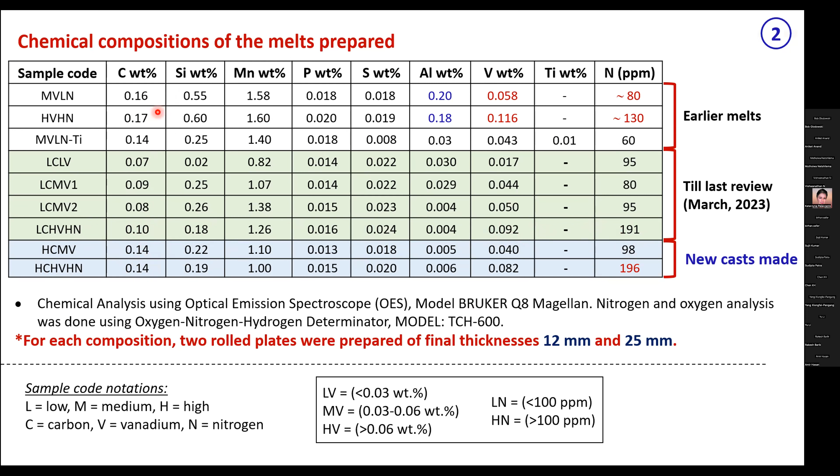If you have gone through the chemistry, in certain cases we got last time a little low carbon level, but high vanadium and nitrogen level, so this steel is interesting to look into. This time we have managed to increase the carbon level from 0.1 to 0.14, because structural steel generally has carbon around 0.15. So we were quite happy with this composition, but I am showing the further things.

So these are the Thermo-Calc predictions. Naturally, the steels where we have added more vanadium and nitrogen have a precipitation temperature that has gone up to about 1100 degrees. Going to the next slide, you can see the precipitate temperature and precipitate fraction we are showing, mostly vanadium carbonitride precipitates that we are expecting.

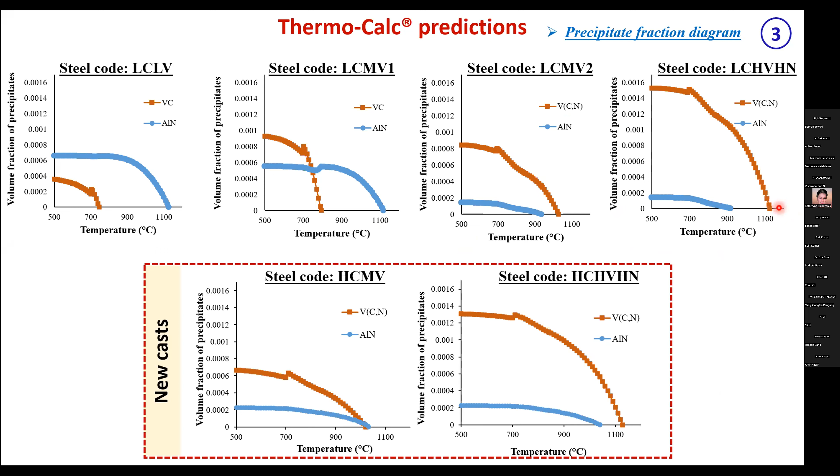These two I have marked in blue because in the presentation that I shared with Dr. Dev a few days back, these calculations were wrong, since we had dragged these temperatures a bit high, so zero values came up. So these are the actual precipitation start temperatures for this grade, 1020 and 1128. Still, 1128 may be considered a bit on the higher side for this high carbon, high vanadium, high nitrogen steel.

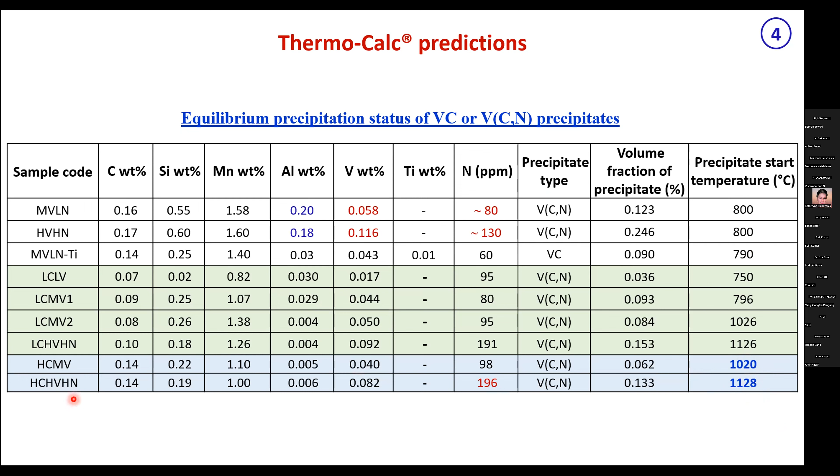These are the microstructures that I presented in the last meeting, which were rather good, quite fine microstructure with grain size in the range of 8 to 10, ferrite grain size in that range. The previous slide was for the 12 mm plate; this slide was for the 25 mm plate, where the grain size was a little higher, of course, because of the larger thickness and lesser rolling reduction.

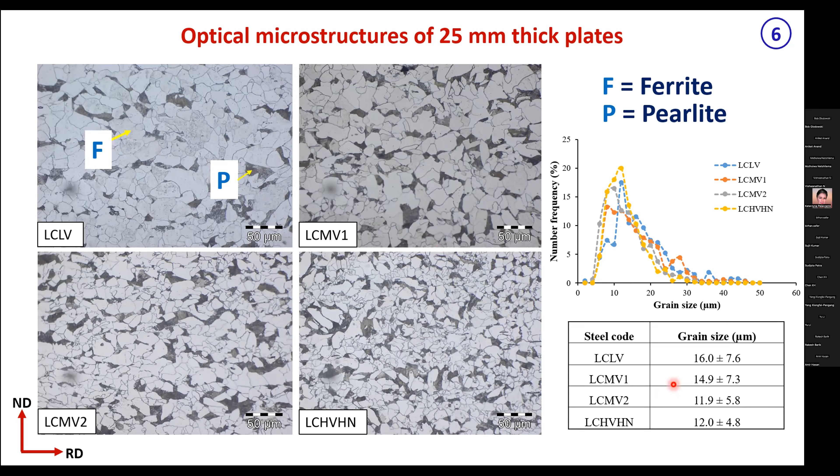This time, one issue happened with us: our grain size was relatively higher, you can see 13 and 18 in that range. We would have loved to have a smaller grain size possibly. As I talked to my collaborators, Dr. Kumar and Mr. Aniket at SAIL, they said the furnace temperature was a bit high and behaving a bit erratic because it was newly installed. So that, and the rolling schedule also, there may be some issues for which the grain size is a little higher.

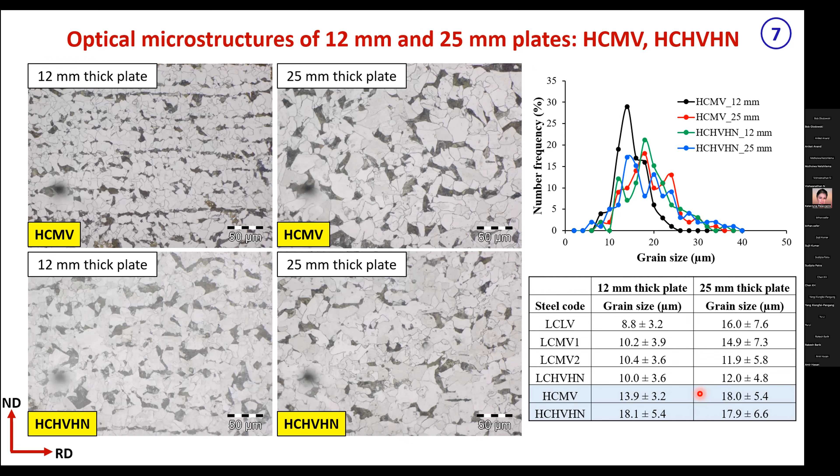So last time, these are the EBSD maps I presented, and this time, these are the EBSD maps. You can see the grains are slightly higher, but it's a nice ferrite-pearlite microstructure altogether.

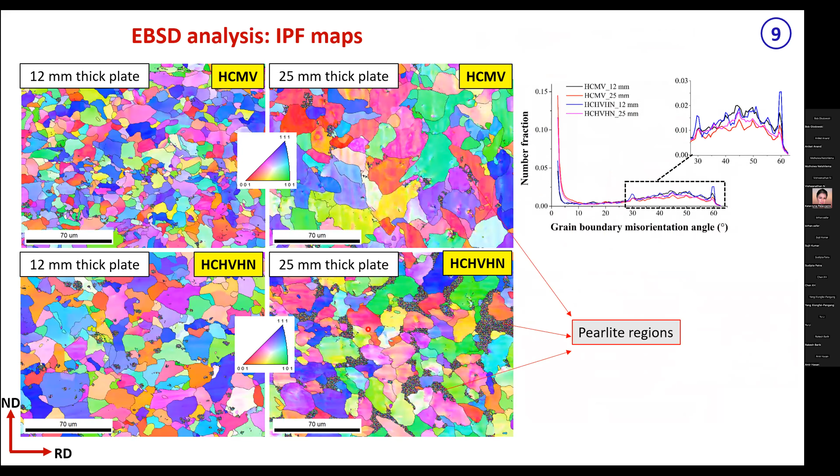Overall, these were the tensile properties. Last time, these were the properties that I presented here, for low carbon, high vanadium, high nitrogen steel, which showed quite high strength. You can see the yield strength level very conveniently more than 450 MPa and even crossing 500 MPa. This time we got good strength in our high carbon, high vanadium steel, but the strength was not that high, maximum around 460 MPa. And in this steel, high carbon, medium vanadium, the yield strength is around 400.

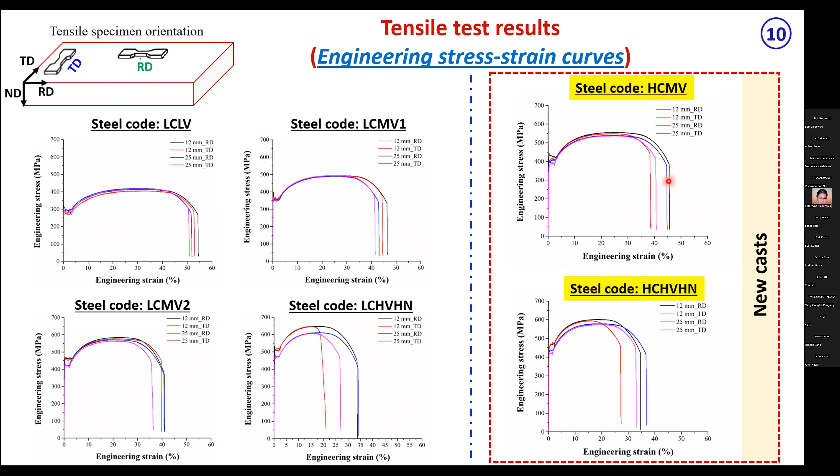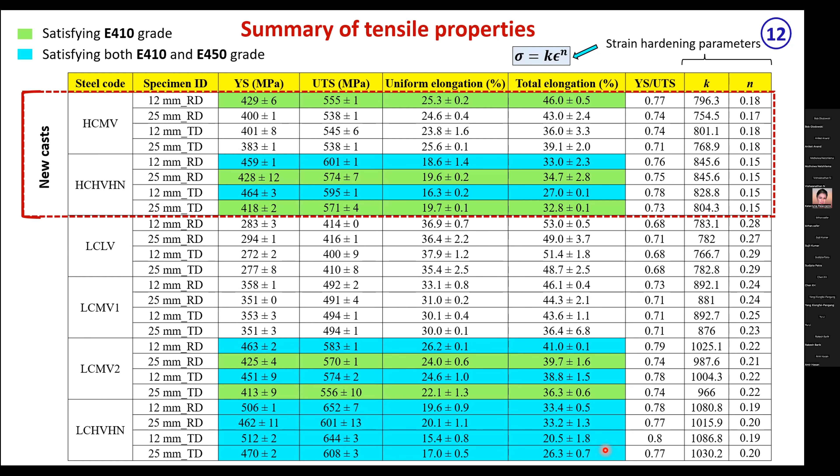And these are the properties I presented last time. In some of the cases, it was crossing even 500 MPa. So these were the properties. Overall, I would say that good variation happened in composition and processing, and we have seen our best case scenario as well as worst case scenario, and in all cases, what is the range in which we can get the properties.

Strength as expected increased with carbon, vanadium, and nitrogen. Nitrogen, of course, is very beneficial in vanadium containing steels. As we have seen, even at low carbon level, we have got very good properties. But this time carbon gone a little higher, but we are not getting that much benefit. In both steels, there was nitrogen about 190 ppm, more than 190 ppm.

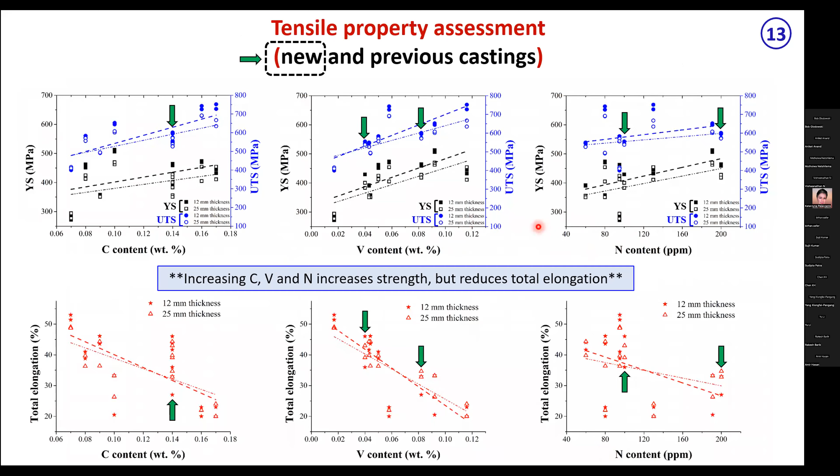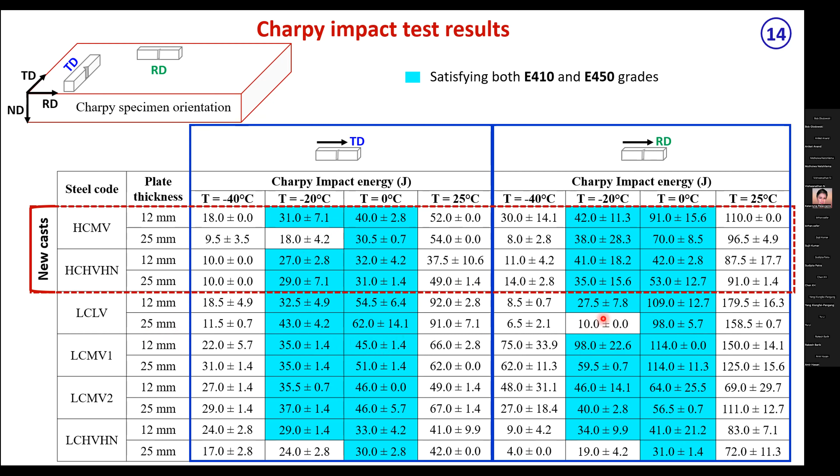Of course, a few exceptions are there where we have got a little less property in longitudinal direction, which we have to investigate. But otherwise, it's quite a decent result.

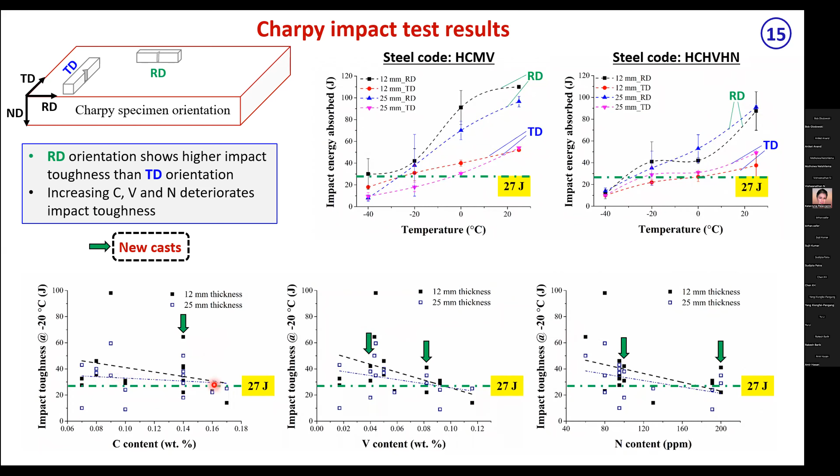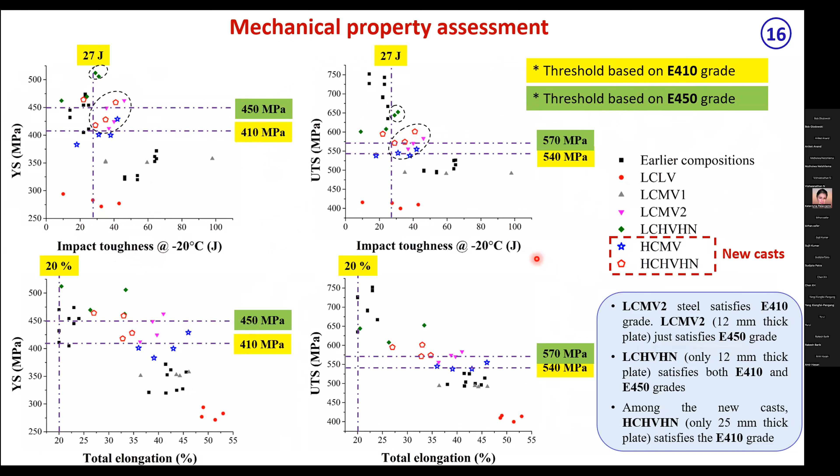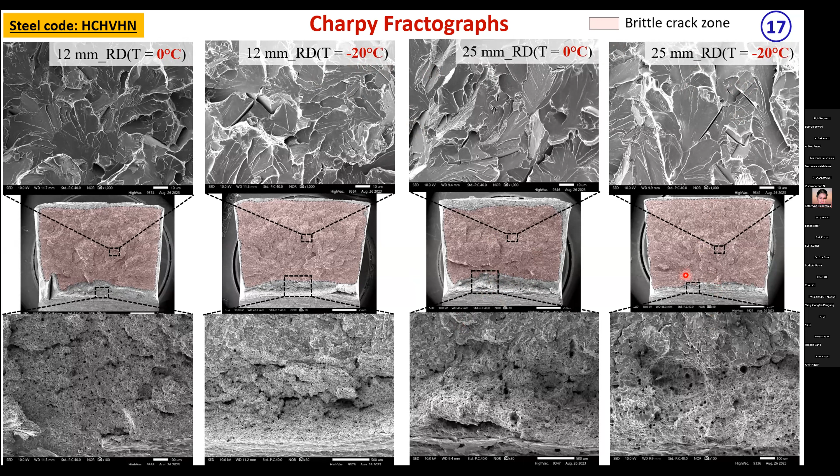Fractography study has also been performed, and as expected, some amount of ductile fracture. These are the minus 20 tested specimens, 0 and minus 20. Even there, we have found some amount of ductile fracture before the cleavage fracture happens.

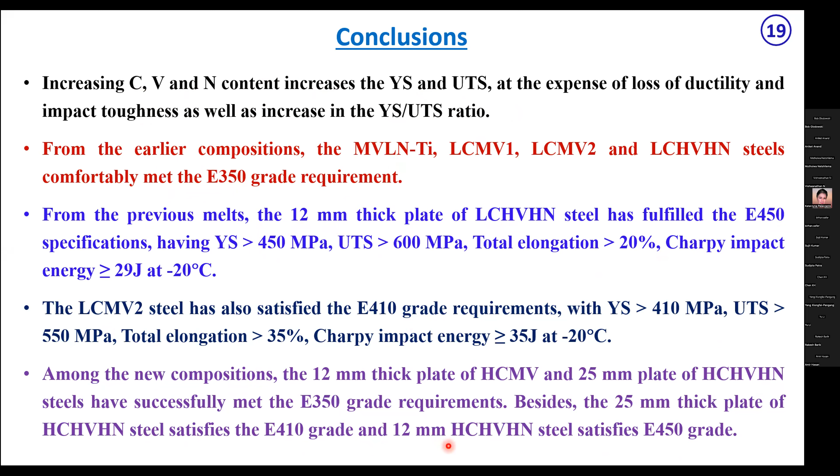And even this time, with high carbon, high vanadium, we satisfactorily meet, I think, this 410 grade for 25 plate and 450 grade for 12 plate. So overall, these are the findings, and we have characterized the precipitates, and this process is going on.

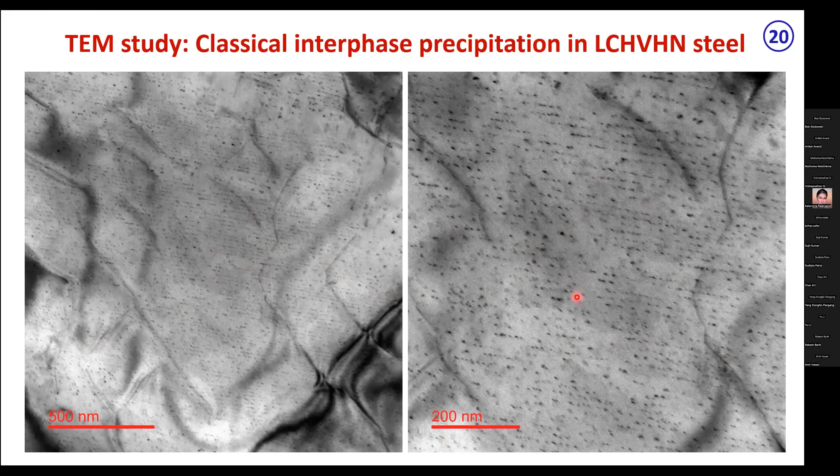Nice interphase precipitation - these are some of the images. You can see in this low carbon, high vanadium, high nitrogen, these are there. So nice interphase precipitation of vanadium carbonitride as we expect in this kind of steel during transformation.

Sometimes we have found some elongated kind of features also. We are studying whether these are fibrous carbides or something else, but these are quite interesting to look into. Or even transformation twin can happen in vanadium steel, we know. Sometimes you see here very fine needle-like precipitates. So these need a bit more study.

In the month of July, we organized a one-day workshop at IIT Kharagpur from this project on microalloyed steel. And you can see the Vanitec logo is there as the funding agency. This has been publicized on Twitter as well as Facebook and Twitter of our institute. If you click this link, you may find some images, pictures or photographs of this conference.

And these were the guest list who presented. Dr. Dave Crowther was there as the chief guest for the keynote lecture. Executive director of SAIL R&D was there. Several chief general managers and general managers of SAIL plants also from R&D. Dr. Vinod Kumar was there.

And they presented their industrial experience on vanadium steel production. Some of us academicians were also there. So it has been a very good gathering involving both academic and industry people. These are our departments where the conference poster was given, and everywhere in the campus this kind of banner was displayed. These were our deans and heads, and even I presented one of the lectures.

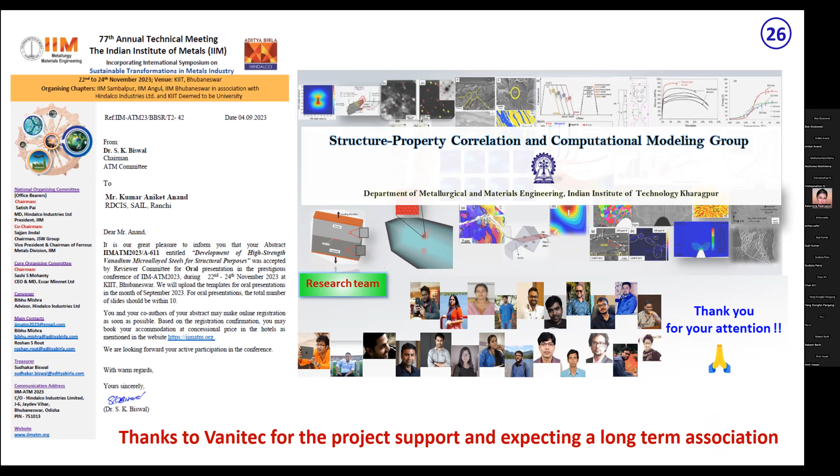Thank you very much, I'm done. That's a great presentation. I hope we can carry on our association, and if you let us know what you need in terms of nitrovan, we'll see if we can help you out there. Are there any questions for this presentation?

I have a question. Thank you for the presentation. I would like to know what were your mill exit temperatures on these 12 to 25 millimeter plates? Your finished rolling temperatures, you mean? Yes, I think it's 850 degrees. Dr. Kumar, can you confirm? Yes, actually it was around 840, 850.

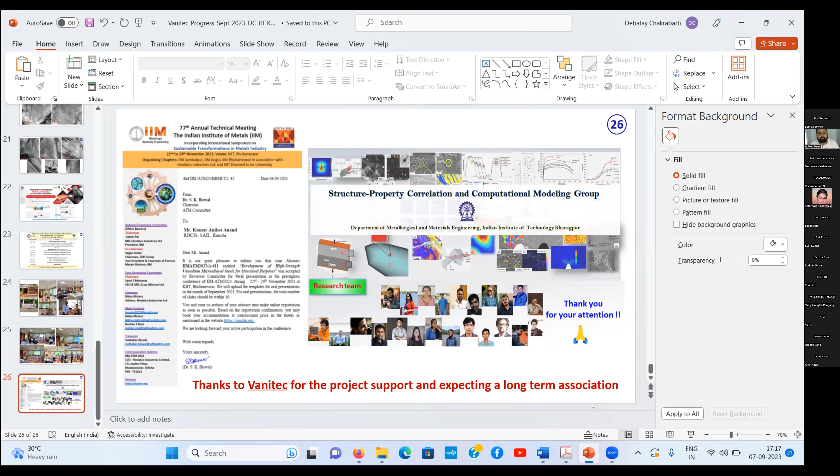850, yeah. Why I'm asking is, according to my experience, one ought to be getting somewhat higher Charpy values at 0 degrees, at least, compared to what you're reporting. Quite a few appear pretty borderline in the 40 joule but below region. Our experience is we're getting at least 80 to 100 joules in that temperature range for those thicknesses, using a good vanadium nitrogen combination. I just can't remember what your nitrogen level was.

Yes, it was 190. Can I answer? Yes, actually these are air induction melted heats, and the inclusion level is expected to be on the higher side compared to what we make at industrial scale. Okay, so once this goes to the industrial trial, you'll get much better impact values.

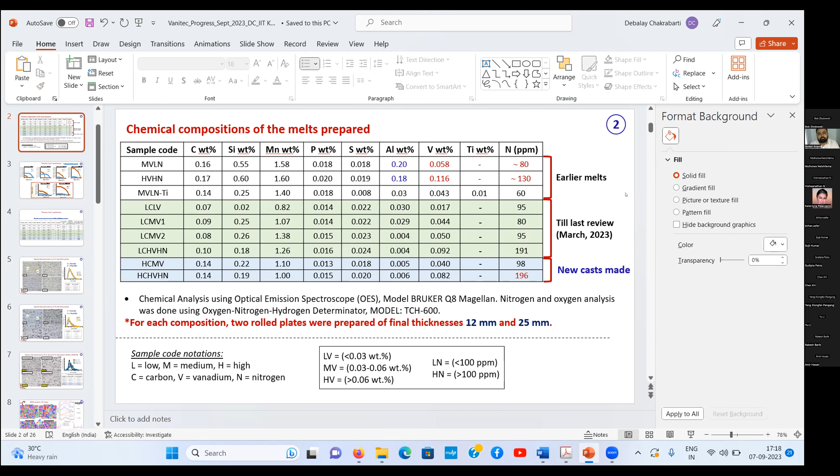Another point is the latest work done on the high vanadium and high nitrogen steel. In that case, there was some issue with the furnace, and the resulting grain size came out around 18 microns, which is quite high. At the industrial scale trial with structural steel, the substrate grain size we expect is roughly 10 to 12 microns, and in all such cases we produce today, the grain size is in that range. If the grain size comes down, toughness goes up, and once the inclusion level comes down at industrial scale, this will further improve. So we expect that once we go to industrial scale trial, toughness will be around 60, 70, 80 joules minimum.

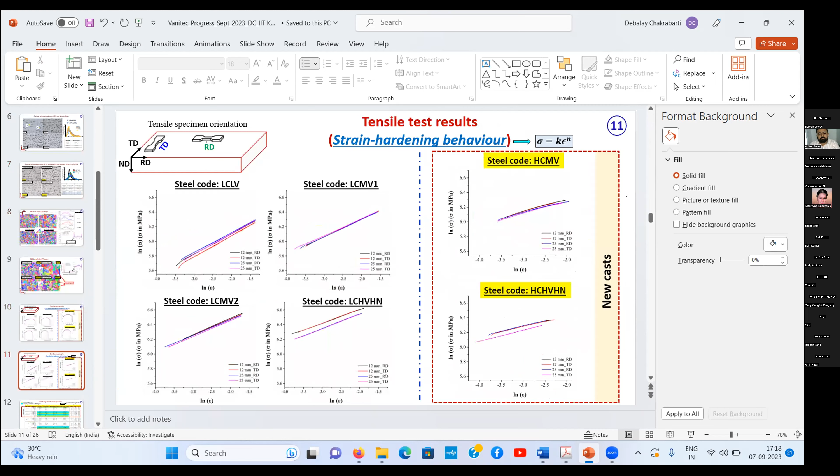Yes sir, these are open induction melted, so the inclusion content is a bit high. Yeah, that may be one of the problems.

No, we find excellent toughness up until 50 millimeters using even conventional rolling, nothing special. So I'm a bit alarmed at those Charpy values at 0 degrees, 43, 46 joules for example. It oughtn't be so low if having chosen the correct combination of nitrogen and vanadium. So maybe there's a pressing reason to get that nitrovan you're talking about. I think one of the reasons is the high sulfur content, a reasonably high sulfur content. Is that correct? Yeah, 200 parts per million.

Yes, so I'm sure - certainly in our plant conditions, whatever volume, the toughness is very impressive. We are getting 70, 80, even plus 100. So there is no issue with the toughness we can achieve once we translate this information into an industrial scale trial. This is primarily due to air induction melting, where inclusion content is on the higher side, and second, the grain size, which has come up around 18 microns. That has also resulted in poorer toughness compared to what we get at industrial scale.

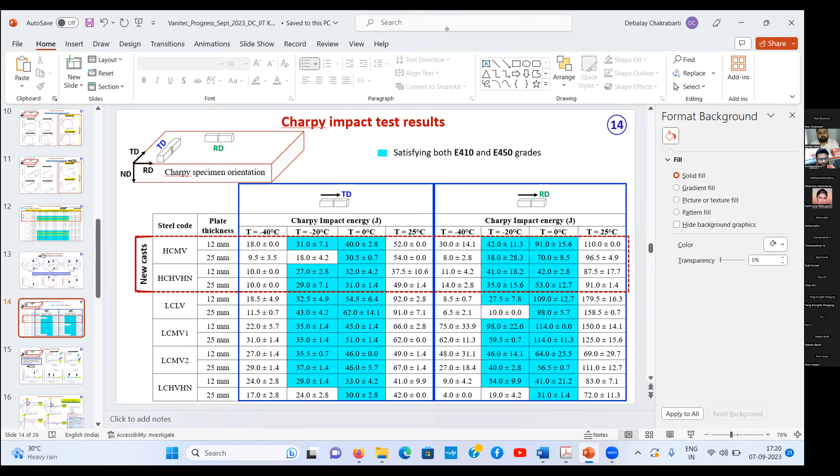Okay, well thanks for that. In the interest of time, I'd better bring the discussion to a close. Thanks again, Debalay. I'm glad to see this project has good cooperation with SAIL, and glad to see it's progressing to industrial trials. I'd also like to compliment you on those interphase precipitation pictures - those were really good examples of interphase precipitation, nice to see that. So once again, Debalay and Dr. Vinod Kumar, thank you very much for your efforts. Okay, if we can move over to the next presentation.